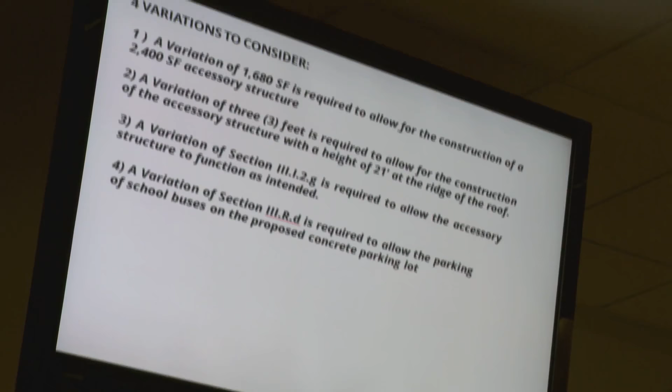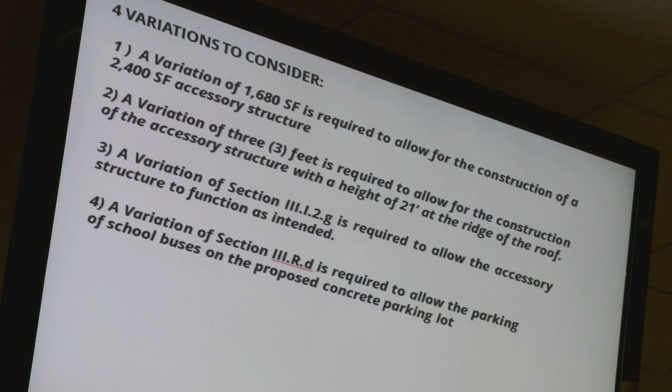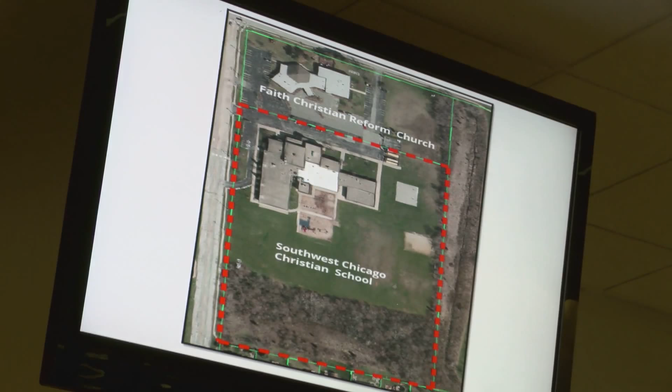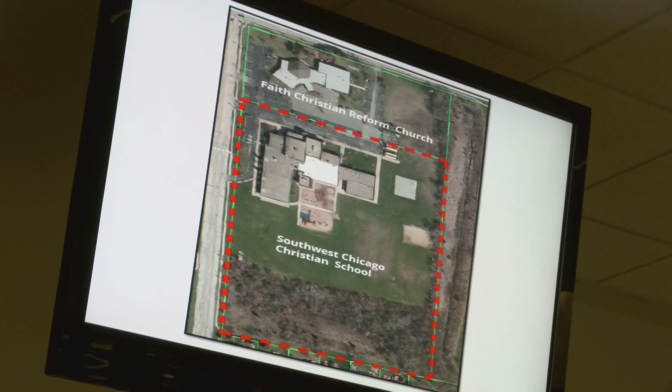As I mentioned, there are actually 2 parcels there. To the north is the church property. This is distinct from the school property, even though right now some of the uses overlap and the bus storage they have now overlaps onto the church property. But they're looking to bring all of that onto their own property with these renovations. You can see here in the yellow is the school, and the red there is the transportation building. The new parking, you'll see at the bottom—the 11 parking spaces—they're actually more screened with this configuration than where they are right now.

That top gray square is where the buses are now, and they're parked in an east-west fashion. They do have it screening through evergreens on the north side, and it's pushed back from the property. I wouldn't say they're an eyesore in terms of where they are now, but with the new location, the new construction of the transportation building will help to screen that somewhat.

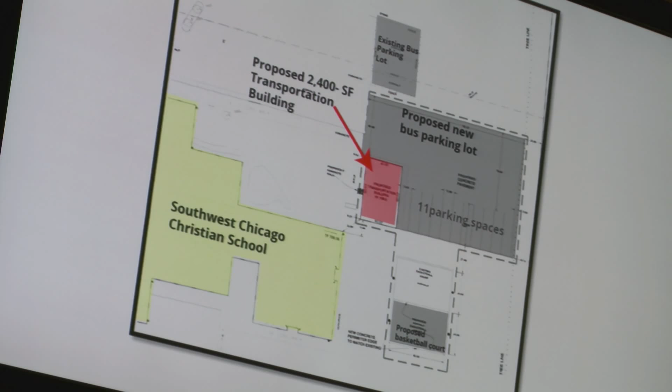And then they're also looking to, because they're going to have to move the basketball court due to the improvements, build a new basketball court.

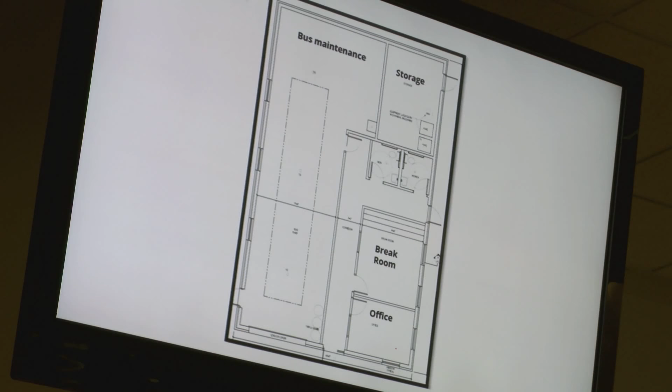This is what the inside of the barn will be. You'll see there's room for one bus to be in there to do minor repairs, oil changes, cleaning. They need storage—right now there's a cargo container on the site, which is not allowed. So they're going to bring that storage inside, and that cargo container will be removed. There is an improvement to that: restrooms, break room, and an office.

That cargo container—this isn't a variation, because they know they're going to have to remove it. It's out there now, and it's not allowed on a permanent basis. So with your approvals, if you approve this site plan, we recommend you condition it on the removal of the cargo container.

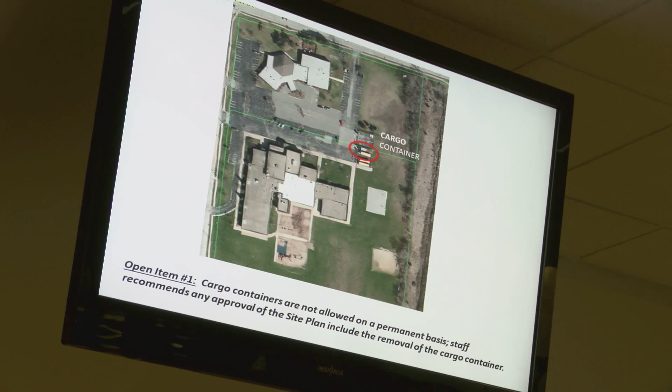Let's move on to landscaping. There is some existing landscaping out there. If you read through the staff report, we reviewed it against the landscape ordinance, which has a lot of requirements regarding buffer yards, but it does provide some flexibility where we have existing landscaping. So they already have a line of vegetation along the east property line, and obviously they have all that vegetation on the south.

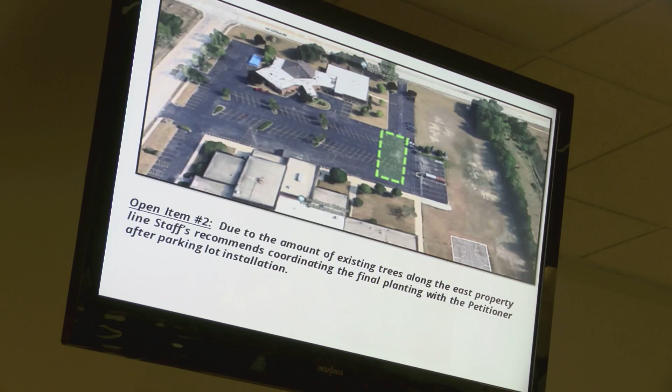So at the end of the day, you see a back and forth on some issues that were raised by the landscape architect and the responses by Southwest Christian School. At the end of the day, I believe they meet the integrity of the landscape ordinance with the landscaping they are providing.

The only other comment was we just want to make sure we're saving as many of the existing trees as possible, and I suspect you want to do that too. You have some nice evergreens on the north side of the existing parking that make a nice screening from 171st Street, so we'd really like to see those preserved.

That was just an issue, and actually I didn't even think about this right now—we could make your approval conditioned upon, as part of the building permit, a tree preservation plan. There are ways they can set up fencing and so forth, and speaking with them, that's what they want to do anyway. But it might be something to think about in putting another condition on your approval, so I'll make sure I note that when we get to our public hearing.

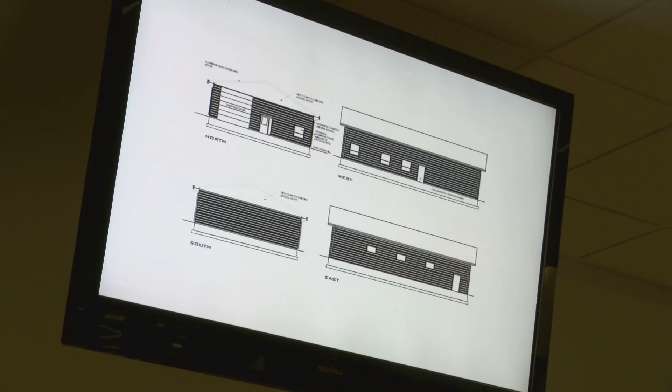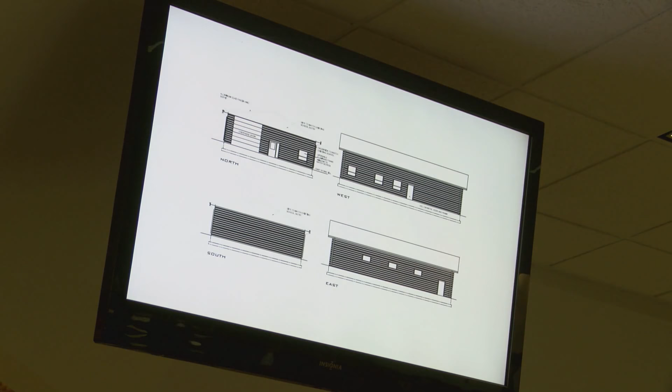With respect to architecture, they did bring their building materials with them today. This is the existing school, and they are trying to mimic some of the architecture that's existing there now. They're going to use the same building, same brick, so it's a fully masonry structure with a front gable, which somewhat mimics what you have going on there at the entrance and with the siding. You can see in the color rendering here, even though it's a different scale than the entrance, it mimics the architecture of the existing building.

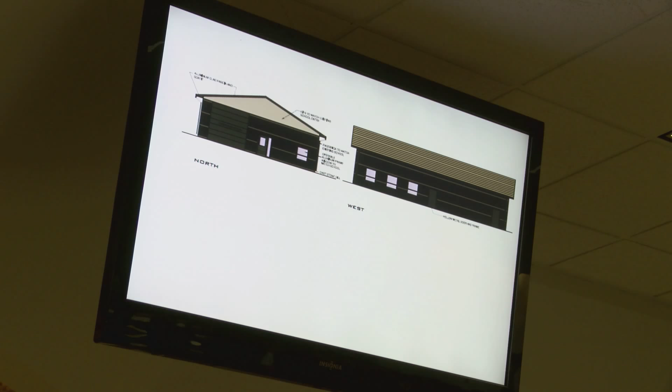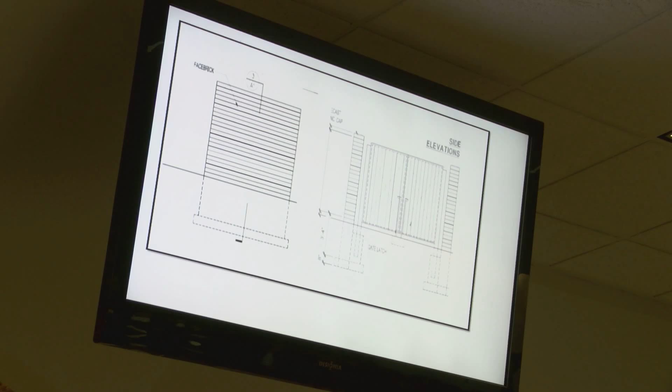It's not a highly visible building in terms of where it's located. Also with trash enclosures, we require the enclosure to be fully enclosed and to match the material of the building, and that's what they plan on doing—it'll be a brick enclosure. I think we have a line there showing where it's going to be located.

One thing I just spoke with the applicant coming in here today that I didn't really notice on the plan, I see it on this plan, but I didn't notice it on the engineering plan. I just want to make sure I point that out to the Plan Commission.

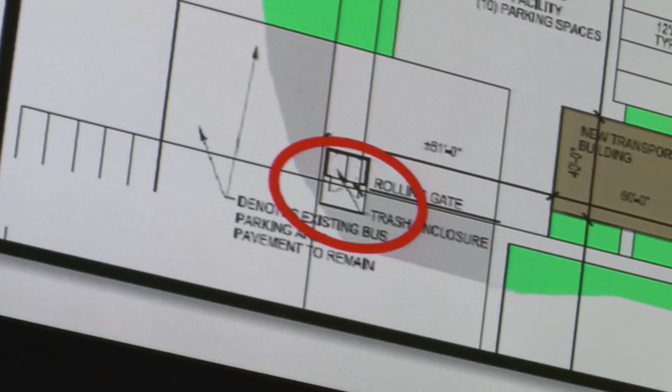If you went out there, you'll see that the buses out there now are enclosed by a chain link fence. I'm presuming it's a 6 foot fence, gentlemen? Is it 6? It looked like it was 6. I think it's 8. Is it 8? I think it's 8. It is. I think the existing one is, yes. Yeah, that's going to be an issue. I didn't know that, I apologize.

So is that going to be necessary? Can you live with a 6 foot fence? I think it's preferred. We're trying to protect against vandalism of the windows, and that's usually tall enough to prevent someone from taking a direct shot at the rear windows of the bus. But if it's unachievable, we can talk about it. Yeah, I'll need to do a little research.

I'm pretty sure in residential it's 6 foot. I don't know if commercial uses can be 8 foot. This is really an institutional use. The good thing is I write my public notices as sort of a catch-all, with a clause for any other variations deemed necessary. So I'll do some research and have that ready for the next meeting. We can certainly talk about it this evening, so you can give direction to the applicant about an 8 foot chain link fence.

I will tell you, having gone out there to look at it, because it's chain link, it somewhat fades away, unlike a solid wood fence would. I can understand your need for making sure you keep the vandals out.

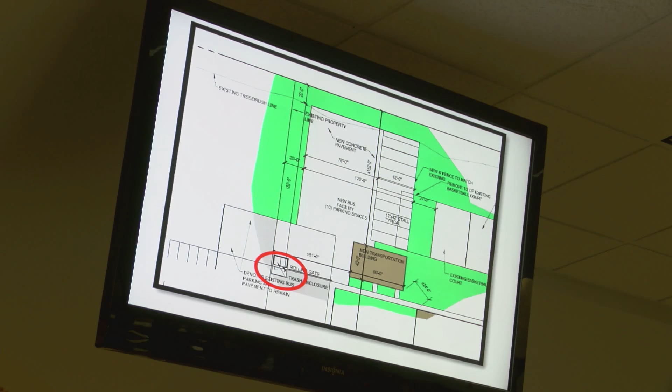So let's talk about zoning. It is in R3 residential district, and schools, primary and secondary, are a permitted use, so we're fine in terms of the uses for the property.

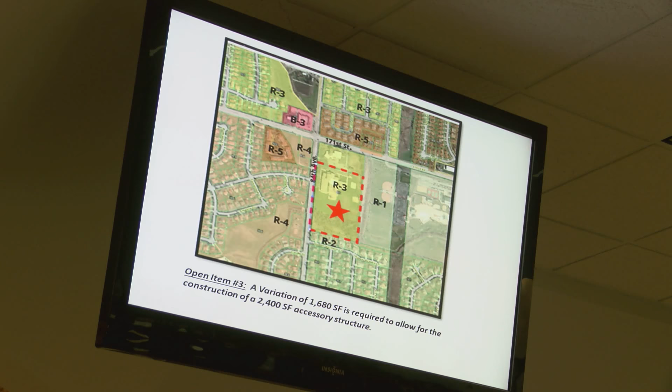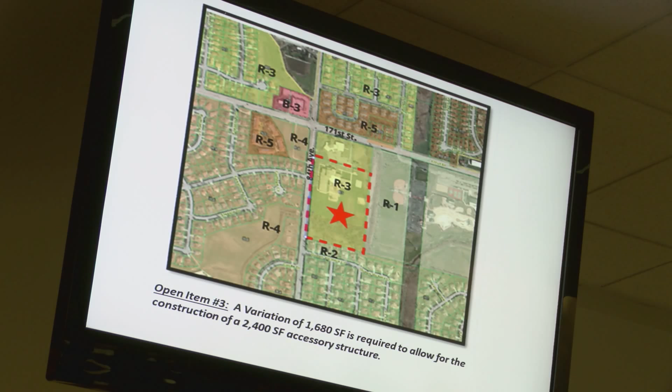However, the requirements of an accessory structure, even though it's used for institutional use, there is a limit of 720 square feet. So you do need a variation on the size. To permit a transportation building of 2,400 square feet, you need a variation of 1,680 square feet. That would be one of the variations we'll be addressing.

The next one is height, and again 18 feet is the requirement up to the peak of the structure, and we have 21 feet on this proposal. You could certainly flatten roofs, but it's not going to give them the height in the building, and it probably would be a different slope than the front gable, and might look a little odd. So 21 feet is the variation they would need to keep the architecture they're proposing.

The parking of the vehicles - oh wait, I'm sorry, the first one is utilities. Right now, for whatever reason, accessory structures in residential districts can't be serviced by water, sewer. I think that's because most of the time we're thinking of sheds on a residential property, and really didn't contemplate this kind of use. But it is there in our ordinance that you can't have water, sewer, or natural gas running to the building. They obviously need that to function as a transportation building. So that would be a third variation you'd have to consider.

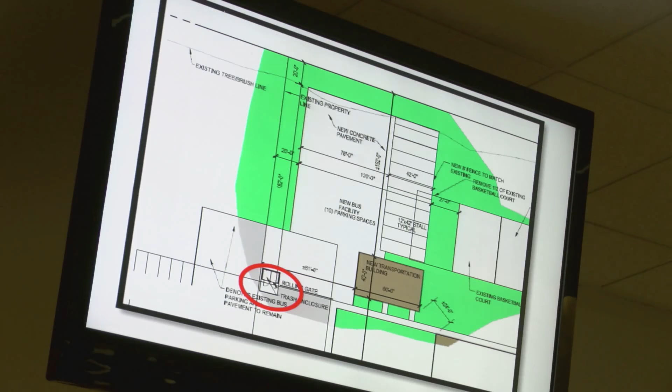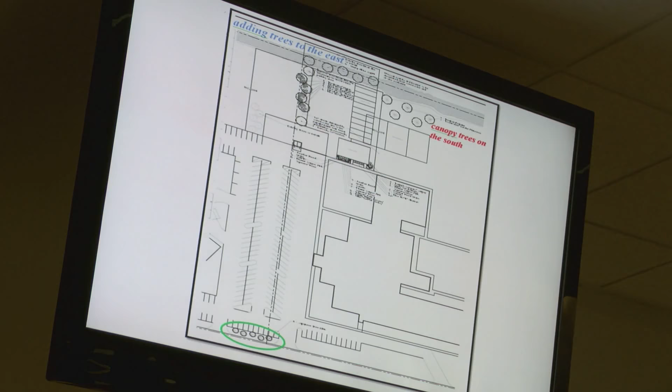And then the last one would be the parking of commercial vehicles. They have to be enclosed in a structure in a residential district. If I go back to this plan, to try to house eight buses in the garage would obviously end up being a fairly large garage. I thought I could go back far enough. But it would be cost prohibitive, I would suspect, and they have historically housed 8 buses on this site for the last 10 years. And then there would be a fifth variation for the height of a fence.

I do need to do some research, I just don't know off the top of my head. I know we do allow 8-foot fences in commercial and industrial districts. I'm not sure that would apply in a residential district, even though it's an institutional use. So I do need to look that up for you. I might be able to do that while you're talking.

So, summary, as you see in your report, we have 6 open items.

The first one is the cargo container. So I would recommend in your site plan review, we have 2 approvals we're looking at, site plan review and variations. For the site plan review, I would recommend that you have a removal of the cargo container as part of your site plan review. And then make sure you protect the existing trees would be another condition I would recommend.

And then the variations, as I mentioned, you've got your size, height, the extension of utilities, the parking of school buses outside, and then the last one might be the fence height. The standards are written in here for you to consider when we come to our next meeting for a vote. It's just in there for you to think about, as well as the standards for a variation.